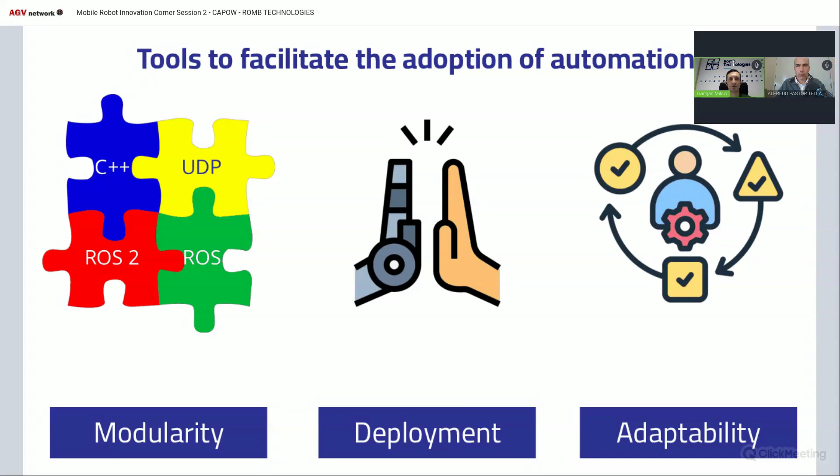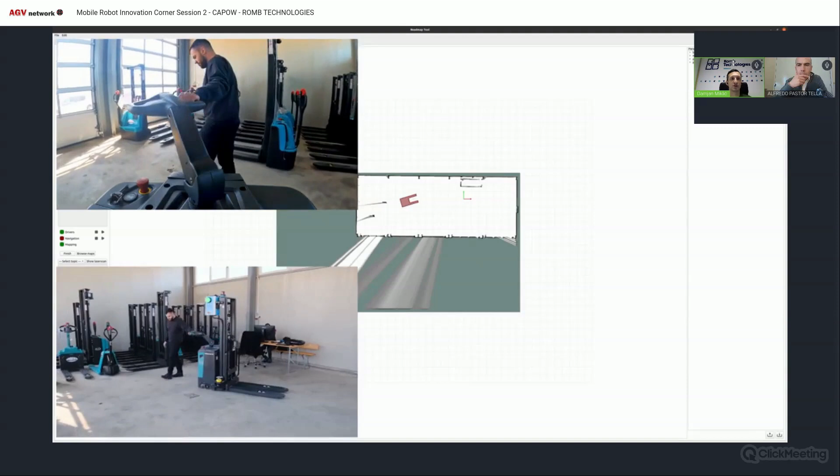Deployment starts with making a map of the environment. It used to be that you needed reflective markers which need to be installed and tuned, but now with our software solution, you can just drive the robot around the environment manually once, and the robot will use the laser scanner data to build a consistent and accurate map of the environment. In fact, this map can be used immediately for navigation - there is no need to clean the map or remove artifacts. The robot uses its onboard laser sensor and wheel encoder, fusing this data to localize the robot in real time using just the natural features of the environment.

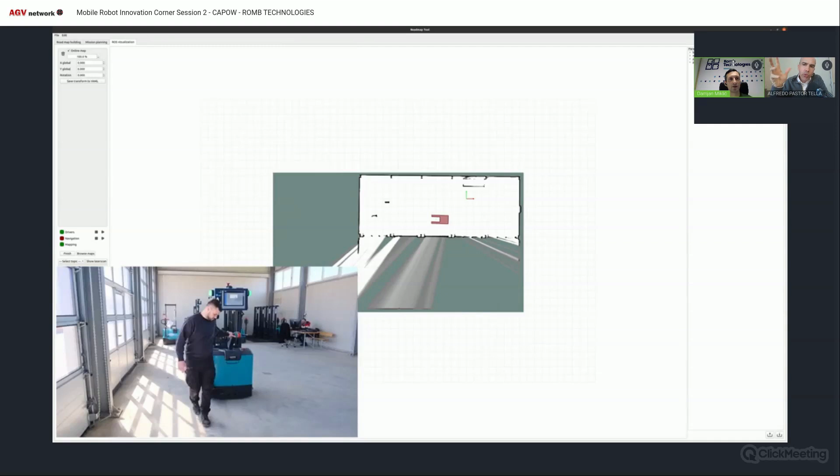But Damjan, when you say that it's not necessary to clean, I can imagine that it depends also on the environment, because if you have very neat walls or columns, maybe it's true. But if you find many different things, maybe you need to clean somehow. How does it work?

That's true, so there are situations where some cleaning may be necessary - typically if you use the safety laser scanner for localization, and if there is a lot of clutter around, then maybe you would need to do some cleaning. But typically, if you use it for a navigation laser, so far we haven't had a need for cleaning, because the algorithm is quite robust. As long as it sees some fixed landmarks, some fixed features of the environment, it will attach to those and basically ignore the smaller inconsistencies.

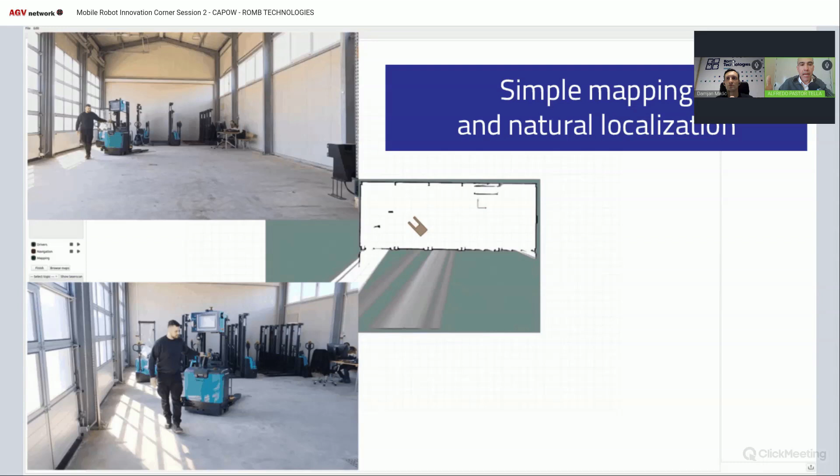So in case we are just using the upper LiDAR, theoretically it's not necessary to clean the map anymore. So the result of the first initial mapping is already good for navigation. Exactly, that's right.

And this was a small environment - we're still a small company, so our testing area is a small hall. But the biggest space we did is 240 by 250 meters, so 60,000 square meters. And this was an especially difficult case because it had a lot of windows and just columns, very few features. So we have tested on this size of environment and it works.

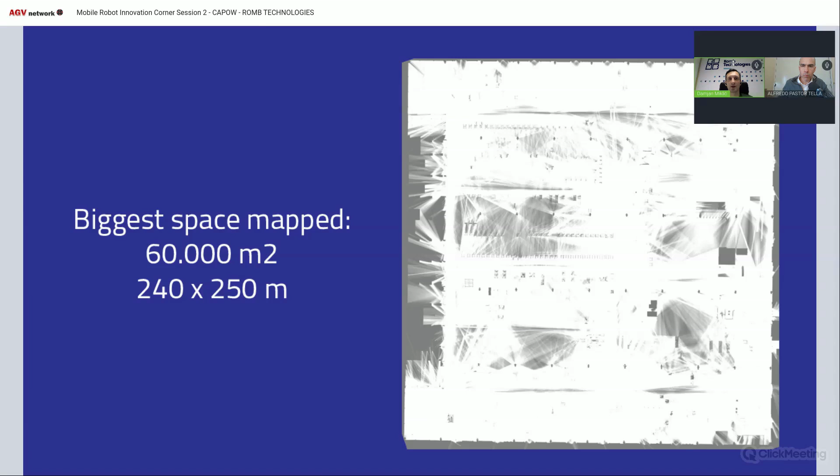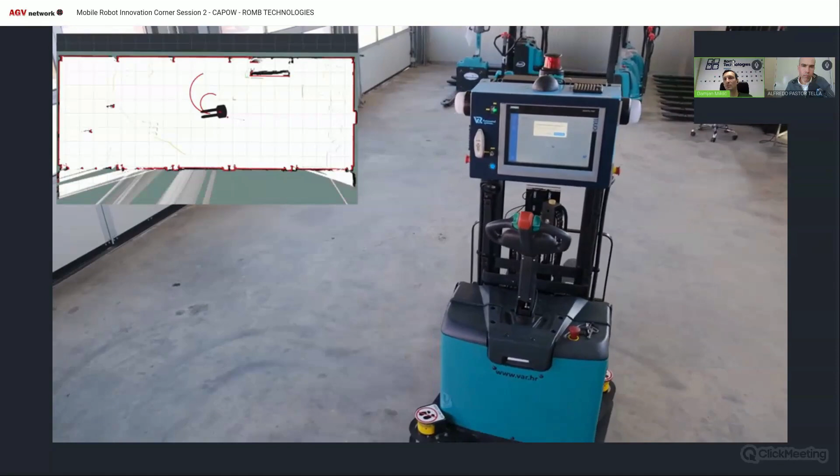So the next important thing for the accuracy and efficiency of the system is calibration. The accuracy of the system depends on the mechanical construction, where you mount the laser, and the laser is never going to be mounted perfectly. So you need a way to handle this, because even a centimeter of error in laser mounting, or maybe half a degree of error, will cause problems when the vehicle needs to position itself.

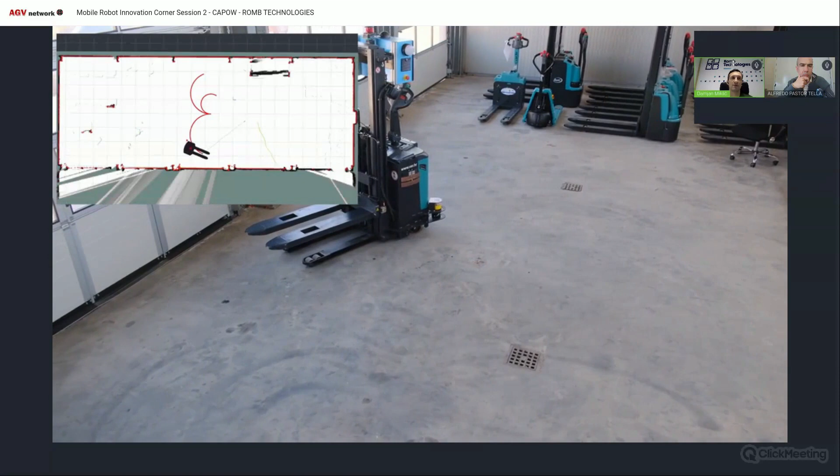This is something that typically people in the field spend a lot of time doing - calibrating. You could calibrate in the factory, but typically the navigation laser is dismounted for transportation, and once you mount it, it's never going to be mounted perfectly. So for this we have developed an automated calibration procedure, so it doesn't depend on the skill of the operator anymore, and doesn't require him to do this tedious procedure where he needs to be focused for a long time. The vehicle just does some maneuvers, and based on these maneuvers it automatically calculates the laser pose, also the parameters of the wheel, if there is some offset of the steering, etc.

All of this, based on the maneuvers, is calculated automatically, and you can put 5 or 10 vehicles to calibrate at the same time, and they will do it in parallel. So one person can calibrate instead of spending up to an hour per vehicle. This procedure takes about 10 minutes for the whole set of maneuvers.

Imagine I'm importing a vehicle with your system and installing it. You said you remove the navigation because it's very costly, and then transportation is a disaster. So typically we remove it, put it back, and then you need this calibration. What you're saying is that you have this automatic calibration, some kind of program that you launch, and the vehicle itself auto-calibrates, something like this?

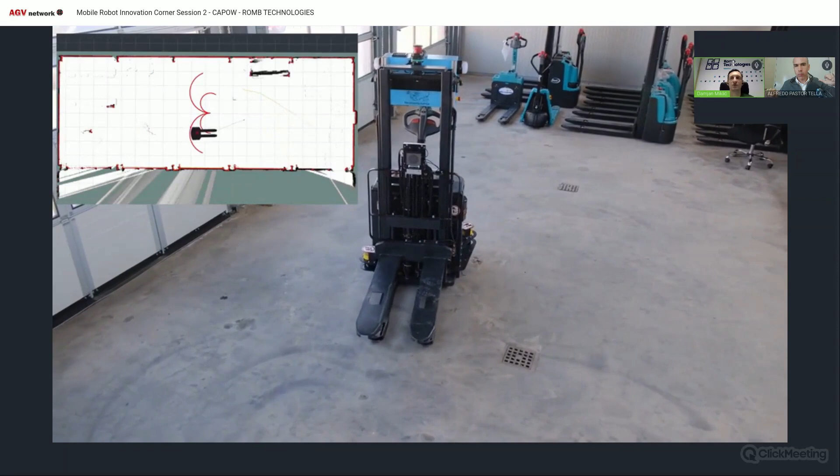Exactly. So the vehicle does these maneuvers that look basically like what you have seen now. It drives in circles of different diameters, and after about 10 minutes, it auto-calibrates.

But do you do the calibration before or after the mapping? Good question. You do it after the mapping, because you need to have the map, and you need to localize on the map to be able to calibrate.

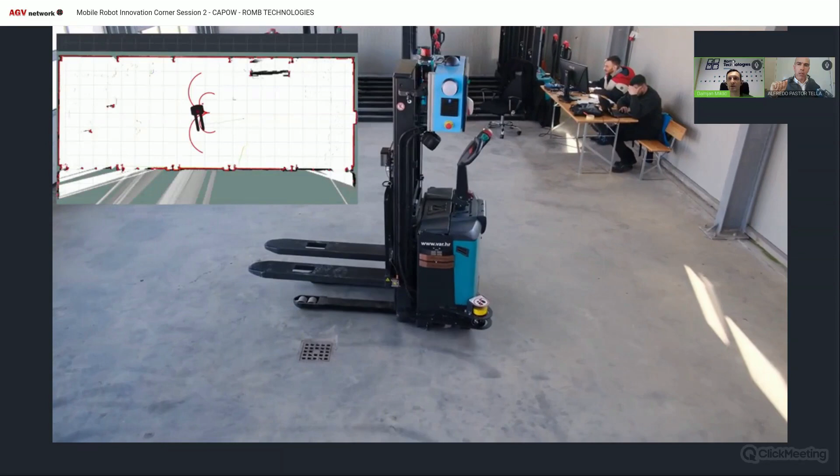And how do you make the first mapping if it is not calibrated? I mean, it's like a loop. Yeah, so basically for the mapping, the mapping uses only data from the laser, so it doesn't care about where the laser is on the vehicle. It will just create the map regardless.

We have one question, Damjan, in the chat, asking if you need reflectors for this mapping. No reflectors at all. We just use raw laser data, which uses the natural features of the environment to localize.

Let's talk about calibration for one second. We have another question asking: in auto calibration, do you need more space even if the area is already mapped? How much space do you need for auto calibration?

That's actually a good question. That can be a constraining factor. You do need some free space, like you saw, for these maneuvers that can be seen here. So they do take up some space.

In any case, you will provide some kind of footprint or something, because if I have to calibrate, I need to know more or less what space I need. Yeah, exactly, that's right.

Okay, good. Absolutely. So there are actually some ways to optimize the space, because right now you can't do it in an aisle. You need to have a staging area free to do the calibration, which if it's a really big vehicle, can be a problem. So we're working on something to do it in an aisle. But right now it does require some space.

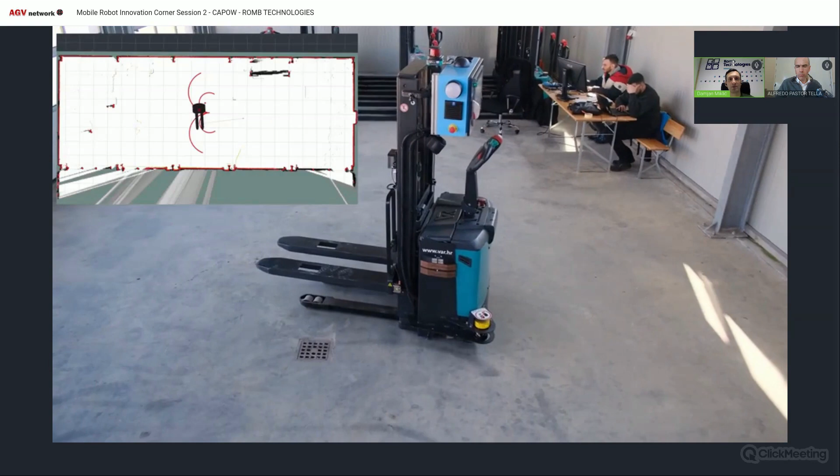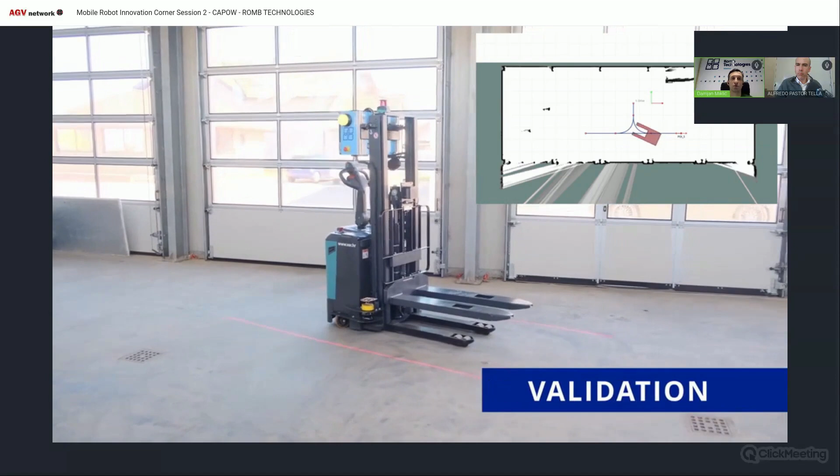After calibrating, the important thing is to check if the calibration has been successful and if the whole system is well tuned, the controller, so if the whole vehicle is accurate. The way to do it is to approach the same point from two different directions and then check the relative error. Ideally we would have a system that would tell us the exact truth, but those systems exist and they are really expensive.

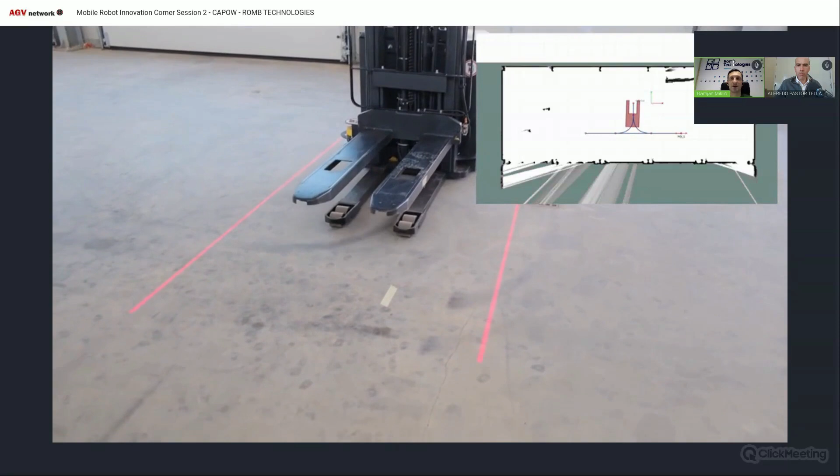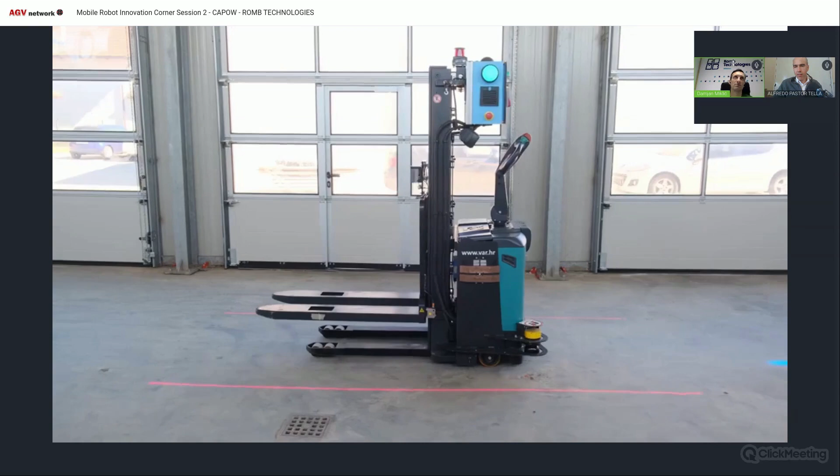As a next best thing, we measure relative positioning accuracy, and this comes up in applications very often. It's much easier to make a vehicle that's always accurate when it always drives the same path. But if you need to approach the same point from two opposite directions, this is really when any inaccuracy in your calibration, your control system, or your localization is going to show up.

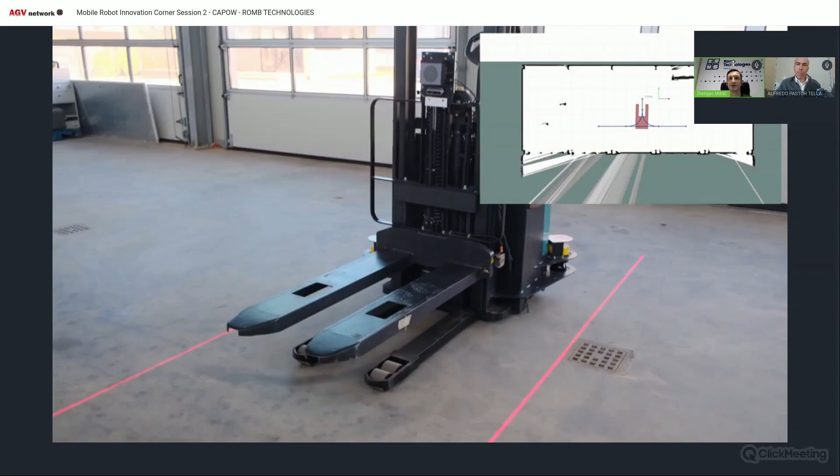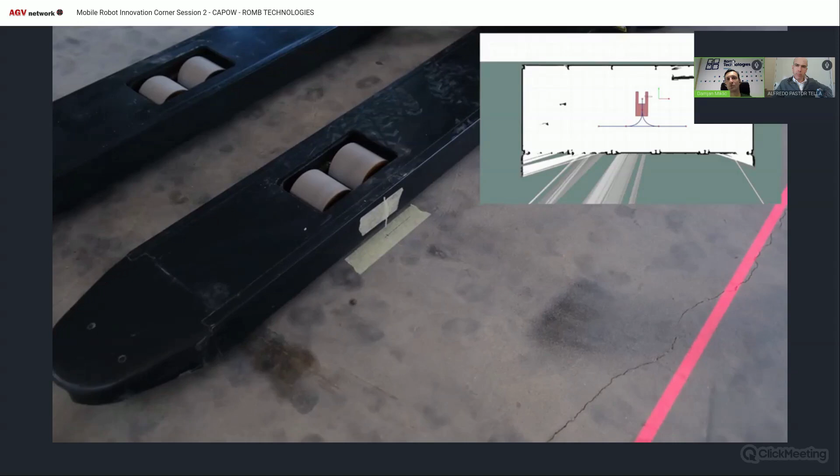And this is a test. So when we claim to customers that our control system, our navigation system, is accurate up to less than 1 centimeter, this is what we mean: that the error in these relative positioning tests will be less than 1 centimeter apart.

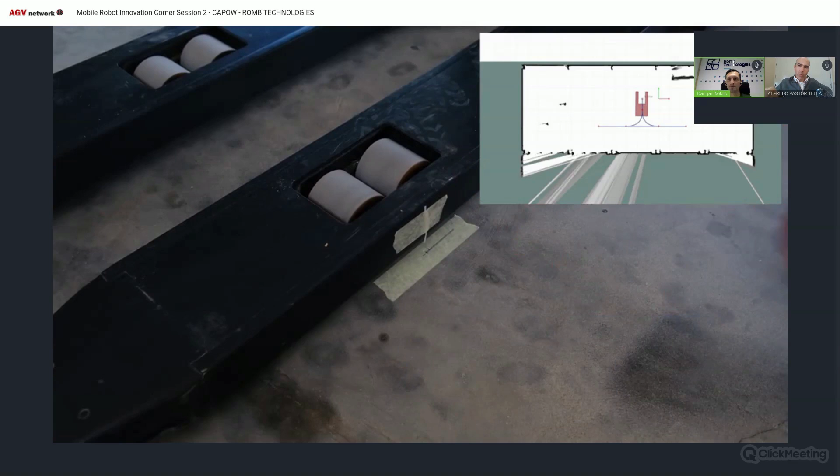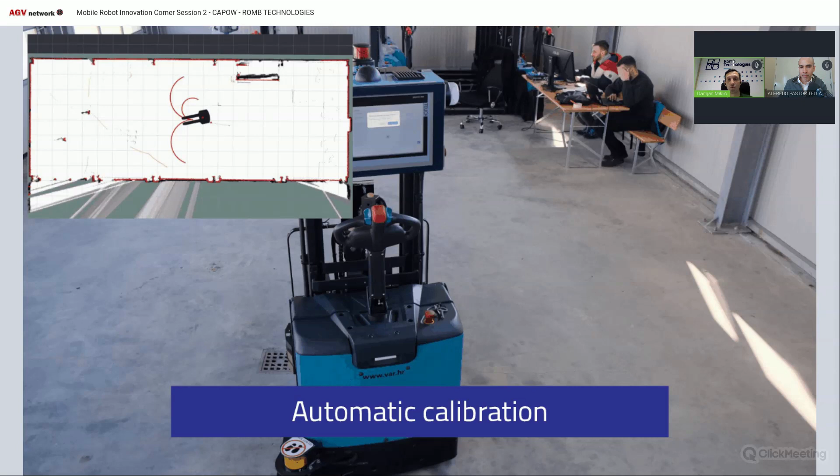We had this question about the accuracy of the localization. It depends a lot on the vehicle, because if the mechanics are not great, if everything isn't perfect on the vehicle, we might have some tolerance problems. But if everything is good, you get about 1 centimeter accuracy. It's not only mechanical; it's also the low-level control loops and how they're tuned. There are a lot of things that need to be well tuned for the system to work well.

So the next step after calibrating is: we made a map, we calibrated, and now we want to design the roadmap.

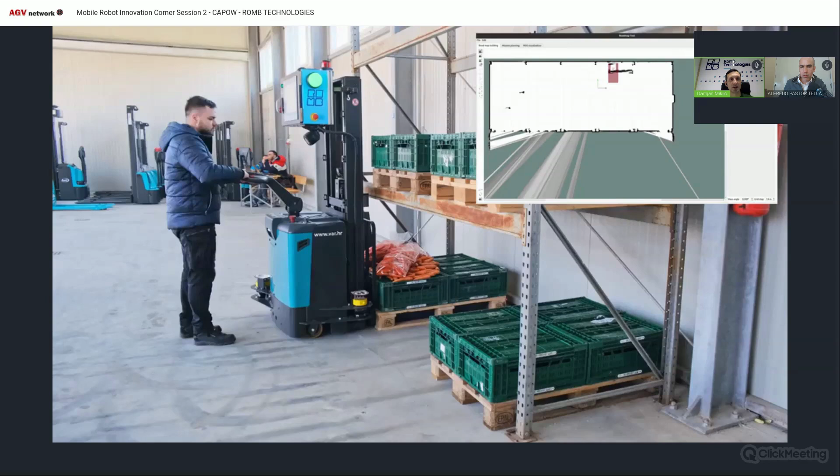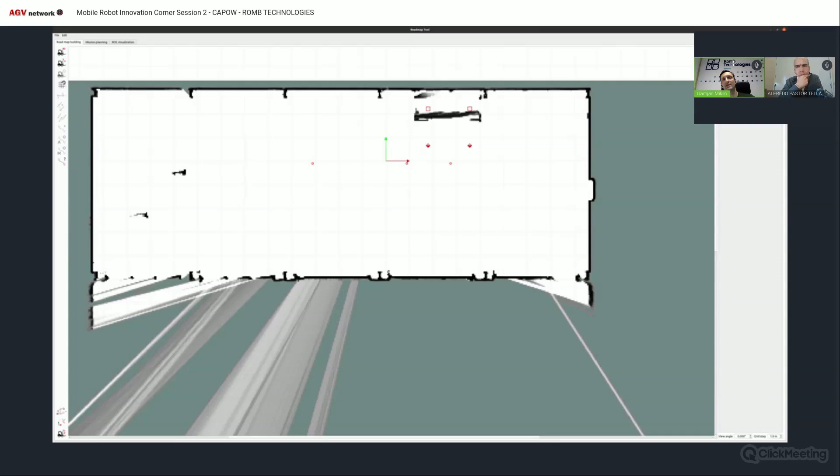When designing the roadmap, typically we start by physically tagging a few key positions. For instance, if you have a big storage rack, we check where the beginning and end of the rack are, place the vehicle there, and remember these points in the map. Then we can interpolate between these points, generating points at fixed distances. This is a simple use case with one interpolation, but imagine a long corridor with tens of pallet places - you just tag the first one and the last one, then interpolate in between, which really saves a lot of time.

And then we place all the different types of what we call points of interest - so you can have a pallet place, a pre-pallet node where the vehicle does some preparation like lifting the forks to prepare to go under the load, some normal waypoints, and a charging node, and we connect all of them.

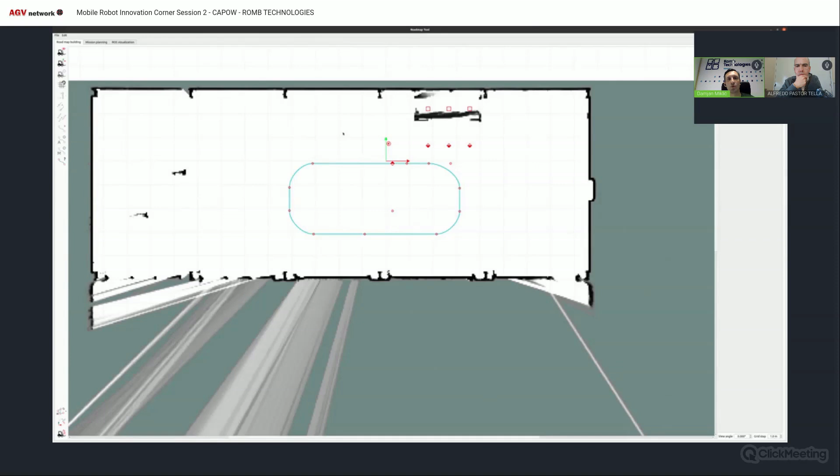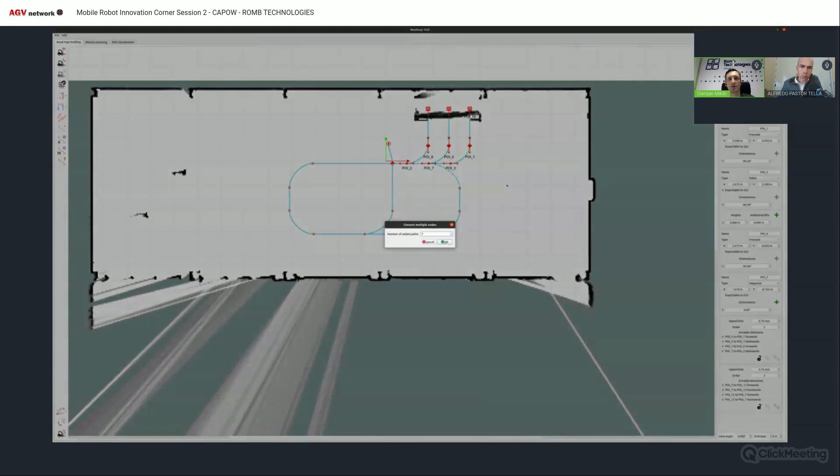With our engineering tool, we support automatically connecting several nodes - you just select several nodes, click connect, and they all get connected together already in a reasonable roadmap. Of course, with a more complex setup you'll need some manual corrections, adding or removing some things, but a lot of this is done automatically, so you don't need to draw every line.

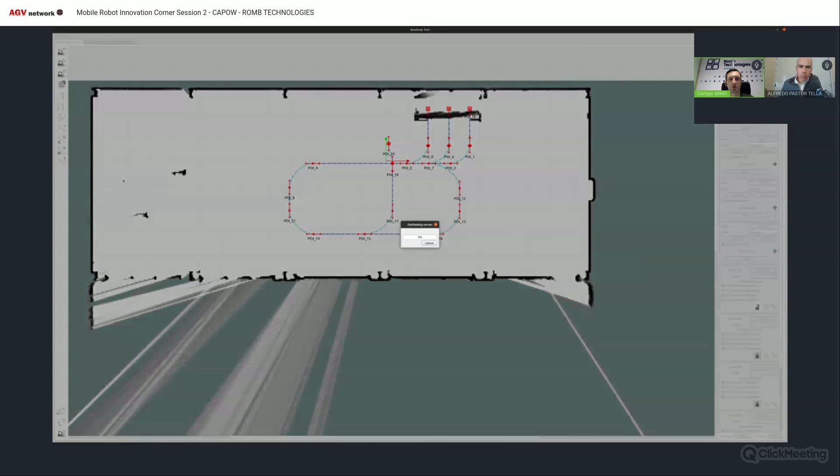Furthermore, there's a built-in optimization procedure, because what's really important is that these curves are continuous, so the vehicle can drive them without error. We have a built-in optimization procedure that optimizes the curves to ensure continuity between the nodes.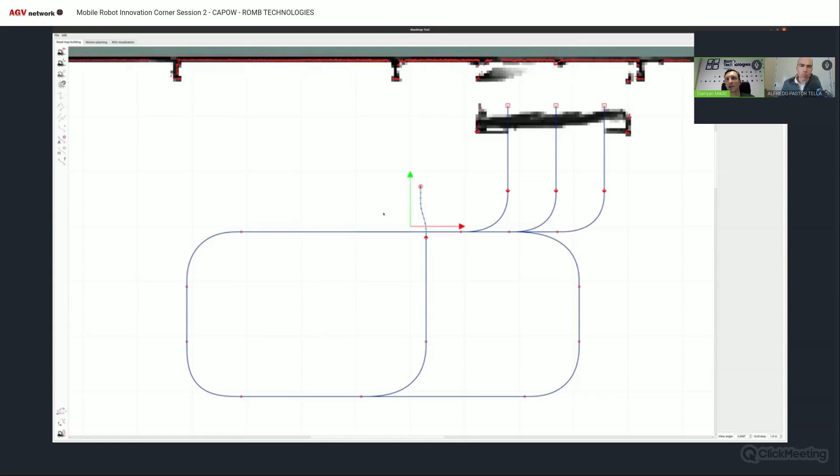Sometimes you do need to tune by hand if it's a complex space, or if you want a more complex maneuver. In this case, the curves are modeled by high order polynomials, where the designer can manipulate the control points to get any shape of curve they want - polynomials up to the 10th order. So you really have a lot of liberty in shaping the curves.

So basically, the system helps you draw these lines, whether they're curves or straight lines, but you also still have the flexibility to modify them yourself.

These drawn methods are important because when you go to install, this is a lot of the job that has to be done on the field, and it requires quite a lot of time - especially when you have a buffer with 100 pallet positions, so routing all these nodes and all these things typically takes a lot of time.

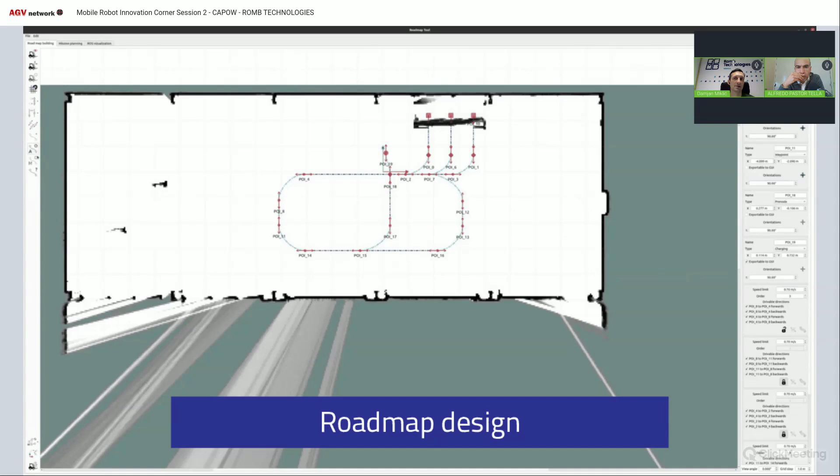Exactly, so this is the part we try to automate as much as possible, while still leaving the opportunity to fine tune it by hand.

So another important feature is that as you're changing the roadmap, it's an iterative process - you make a roadmap, try something, then see that maybe the safety fields aren't right, there's a problem with the safety fields that you need to adjust the route for, and then you need to retest.

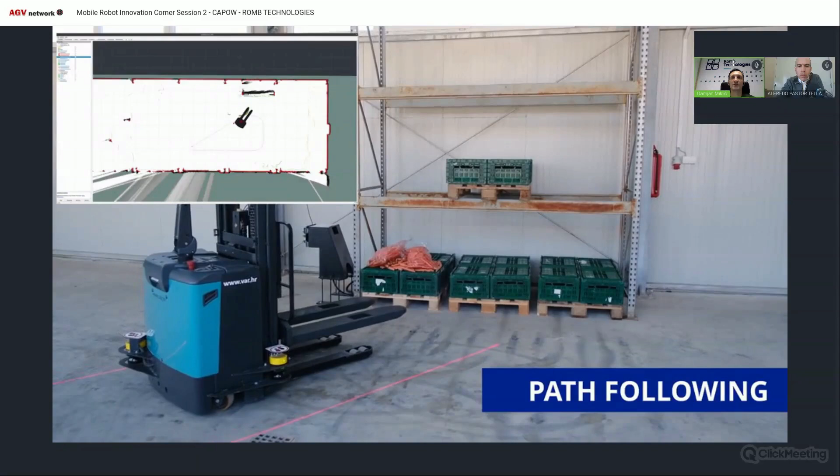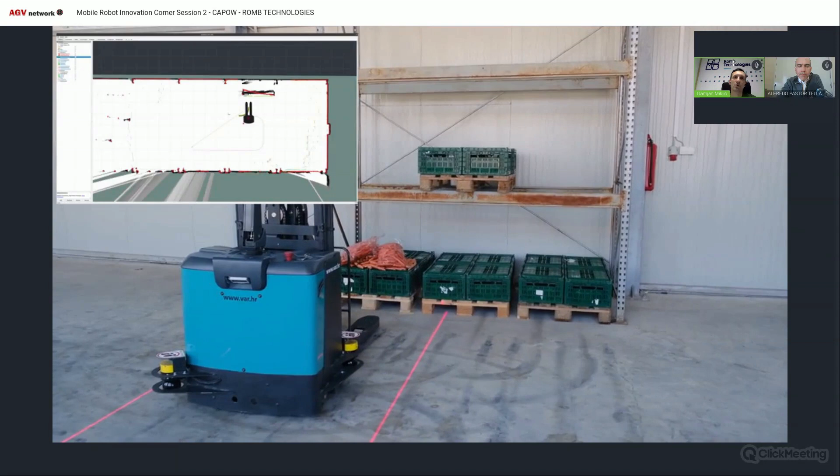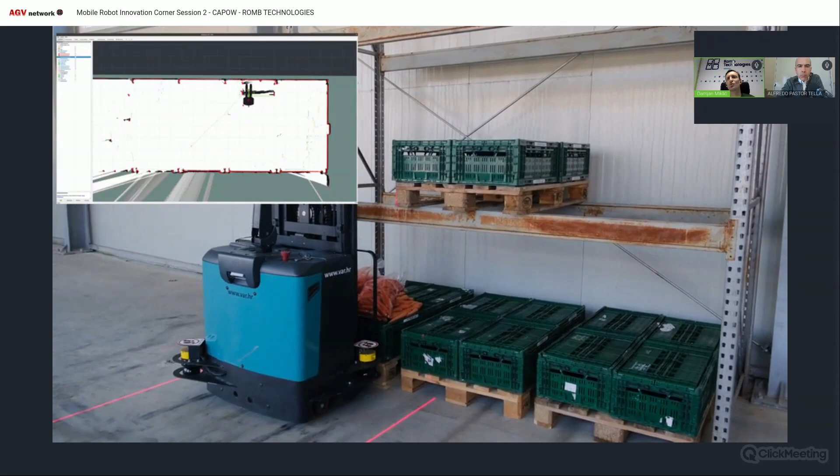All updates to the roadmap are transmitted live to the vehicle. As you make a change, the vehicle already has this roadmap available, and you can just quickly iterate and test. Working with some clients, they had custom in-house tools that didn't support this, and we were spending a lot of time making a change to the roadmap, downloading it to the vehicle, and then seeing that it doesn't work - this iteration. So we really try to make this iteration as smooth and fast as possible. As you change it, it's live on the vehicle.

And then, during vehicle operation, you can monitor the execution of the curves and the way that the vehicle is operating.

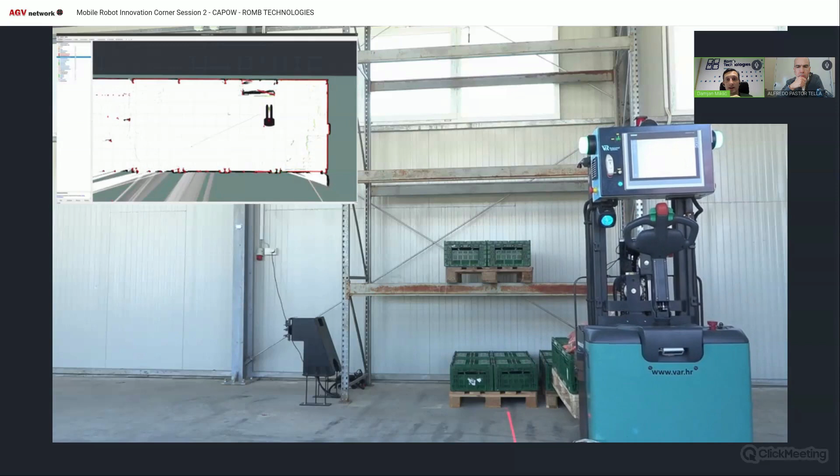Another thing I want to note: this prototype vehicle was built from the ground up by our team. We used a manual forklift base, and we did everything - sensor selection, sensor installation, mechanical conversion, everything. Because we started as a software company, we said we won't get our hands dirty with hardware, we'll just do the software and let other people do the hardware.

But we realized that, like you said before, everything is actually interconnected. So very often when we work with the client, we actually also help them. We always tell them the low-level control loops need to be well tuned for the control, but sometimes their idea of what a well-tuned control loop is differs from what we actually need. So we're also able to help them with that, to really have all the layers of the system working well, to have a whole system that's performing at a high level.

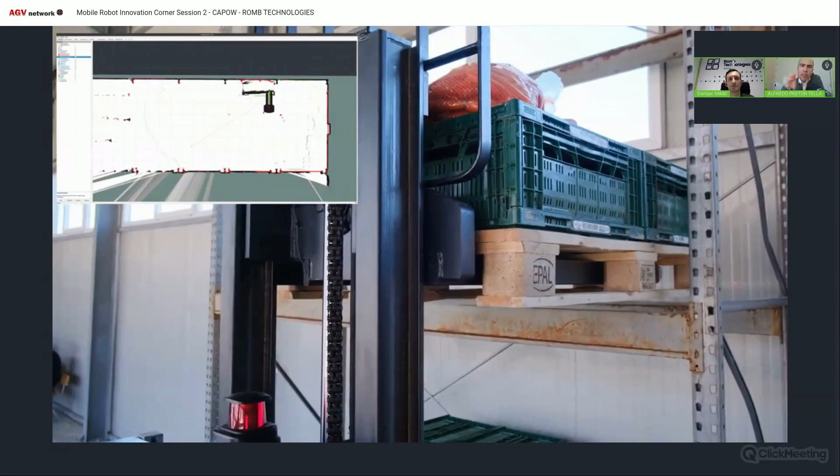One question, Damjan. We see here a forklift, but do you support other types of kinematics, for example differential drive, other things, or is that something you are developing?

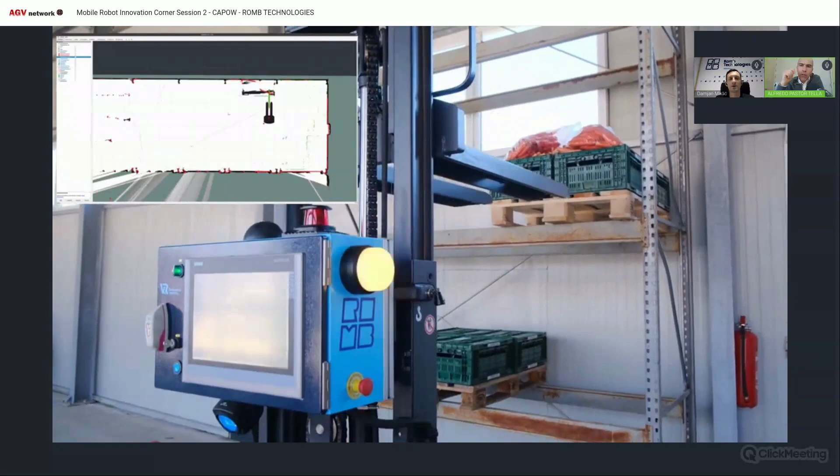Absolutely, great question. Yes, we support any type of kinematics in 2D - moving on a flat floor. This is actually something we did a lot of research on. We support forklift-like tricycle, differential drive, but also arbitrary number and configuration of wheels. Sometimes we'll have 2 wheels that can steer and have traction, sometimes more, like 4 or even 8, in any configuration. Our control system, both localization and path following, applies to any configuration - you just tell it where the wheels are, and it will know how to control the vehicle.

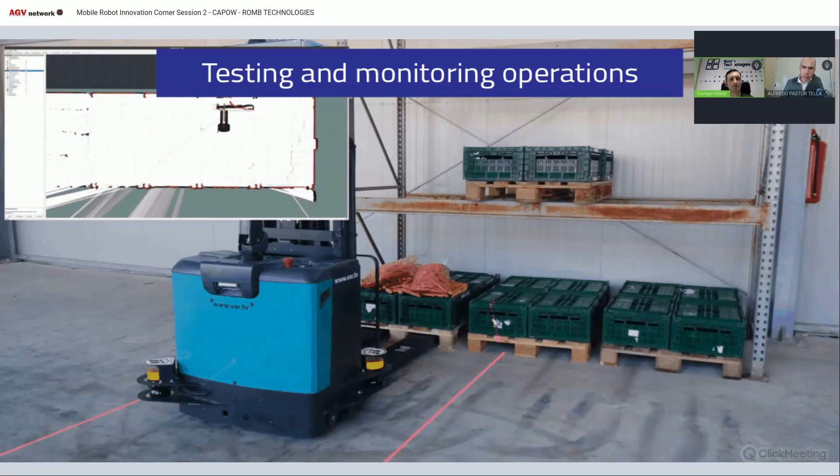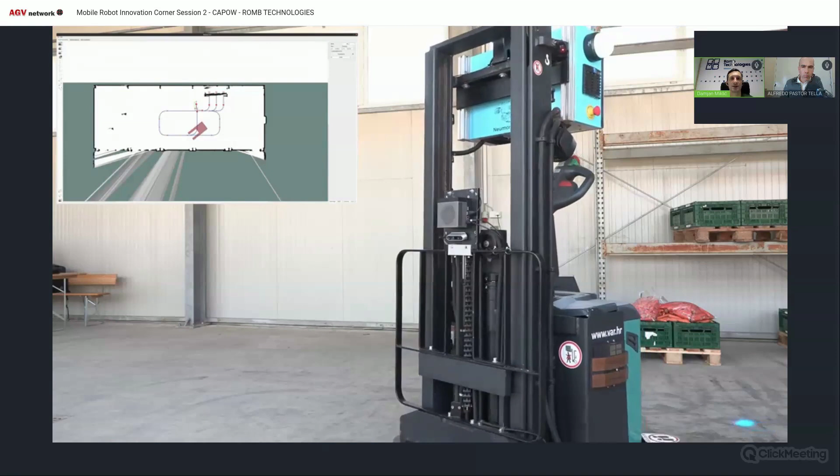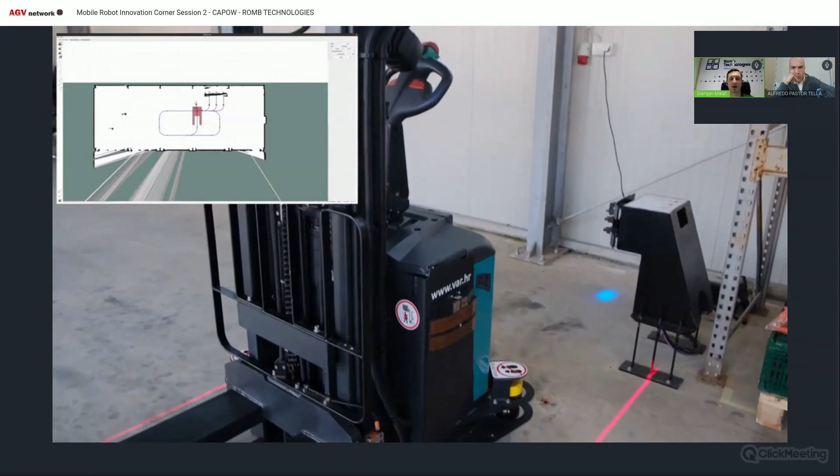So one important thing - this is really something we invested a lot of research effort into. I want to show video number 5, to really work with different kinematics, and with all these kinematics to be super accurate. We use a method based on model predictive control, which has a model of the vehicle. It optimizes - it knows all the maneuvers the vehicle can make, and it chooses the optimal maneuver at every time step to get the most accurate following.

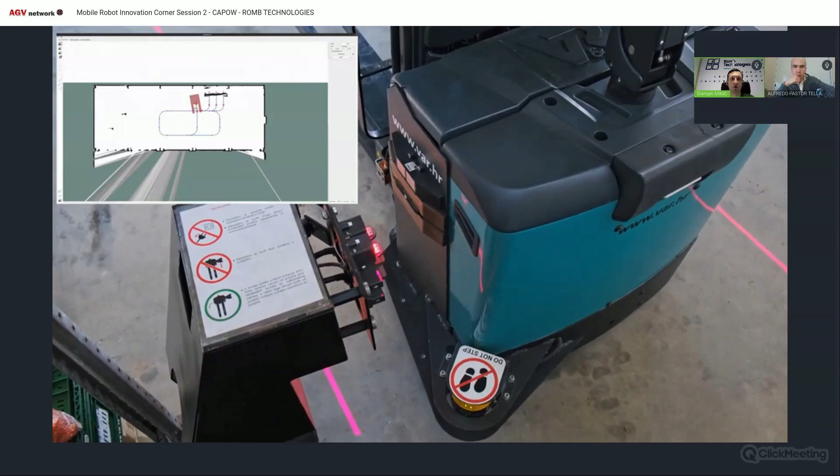And we've recently been granted the European patent for this method. So what is special about this MPC control method? Why is it so accurate?

It takes care of several things. First, it knows the dynamics of the steering - it knows the vehicle cannot steer immediately, so it's aware of the steering dynamics. It's aware of the whole kinematic configuration of the vehicle, and it has special adjustments: when the vehicle is going more slowly, it knows it can look further ahead and has more time to calculate. When the vehicle is going faster, it has less time to do calculations. Model predictive control is also specific because it takes into account actuator limits - not only that the vehicle cannot steer instantly, but also velocity and acceleration limits. It takes all of this into account to achieve really good accuracy.

This is, let's say, state of the art, but it can help deployment - there's still the human-robot interaction part that's challenging, right? When a person leaves a pallet that the robot needs to pick up, a person is never going to be as accurate, or people sometimes leave things where they shouldn't. And the robot, as accurate as it is, in this setup is blind - the laser just tells it where it is in the environment, but it doesn't really check where the pallet is, etc. So what we've been working on intensively is...

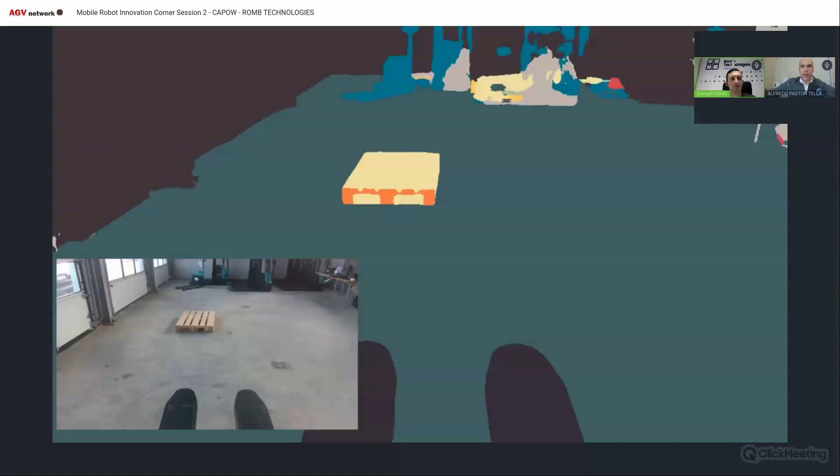You said the human interface is a challenge, and you're being politically correct, because it's a nightmare.

Well, yeah, I guess you could also call it a nightmare.

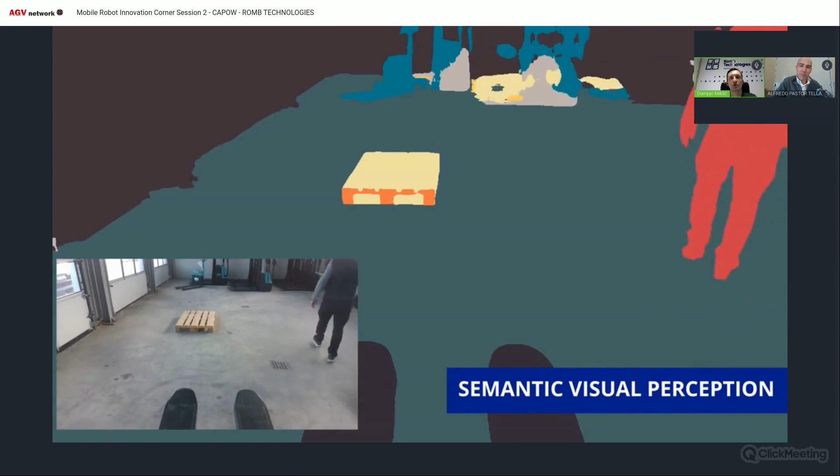So this is a technology called semantic segmentation. It's an AI technique which lets the vehicle know, for every pixel, to what type of object this pixel belongs. So, for instance, it knows.

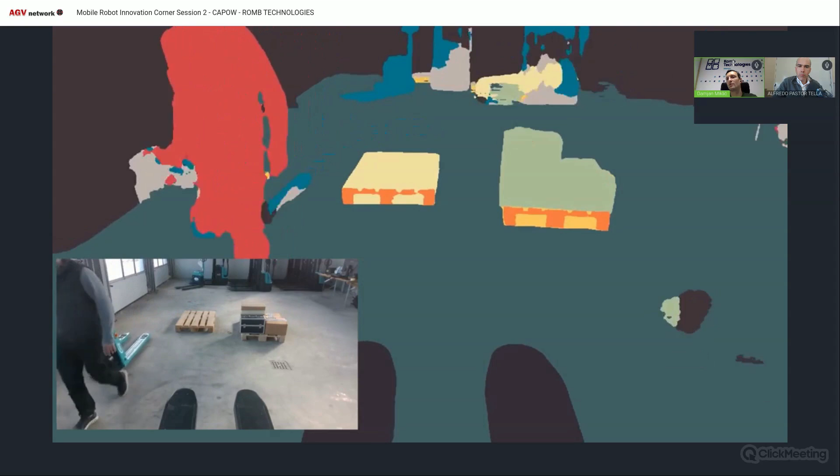We encode this in color just for us people to visualize it more easily. So we see that green is the floor, light yellow is an empty pallet, orange is the pallet face, dark yellow is a loaded pallet, green is a load, blue are other vehicles, etc. This really provides a new level of understanding to the vehicle.

And this is done with a different device, okay? Is it a camera? What is that? Yes, this is a camera. Of course, it needs a camera to do this. Absolutely, yeah, it cannot do this with a 2D laser. No, but it's a kind of add-on.

And what is the typical application of this? Okay, I see you are segmenting the stuff, person, pallet, etc. But what are the applications that you are implementing in the robot? Well, excellent question, this is what I'm actually coming to next.

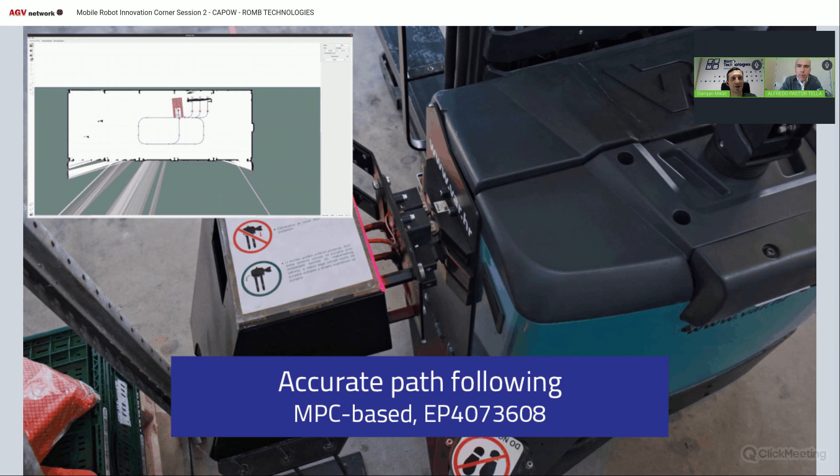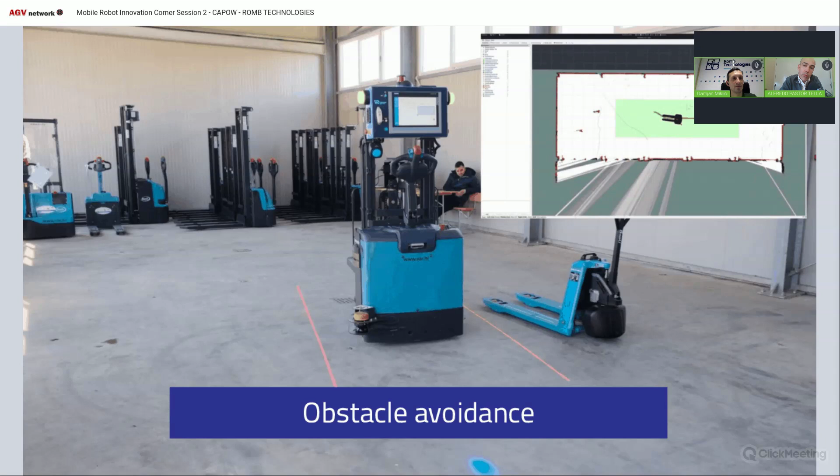So the first application is obstacle avoidance. Okay, so you do optical obstacle avoidance thanks to this segmentation.

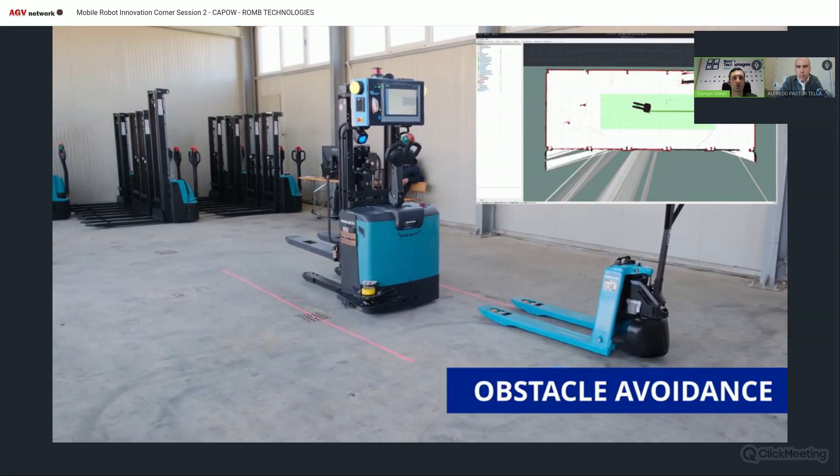Yes, exactly. So with obstacle avoidance we use all the available data. We also use the safety lasers, but we also use the camera. In this case this is also a depth camera, so in addition to the RGB, it also has a depth channel. So we also get coordinates of objects in the space. Based on this, we can, for instance, see these forks, which are typically invisible to the navigation laser, and we can avoid the obstacle.

Of course, avoiding the obstacle is not always a good idea, not always necessary, depending on where the vehicle is. That's why you can define zones. You can see here it's indicated by the green rectangle, where you can say, okay, in this zone the vehicle is allowed to avoid obstacles. In some other zones, not, because this is also, as you know, an issue of safety regulations.

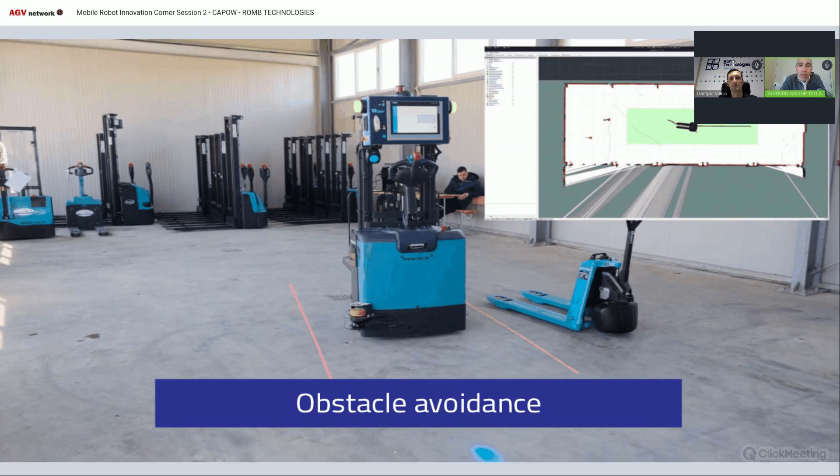You know that in the environment you have to see where the vehicle operates. There is a lot of discussion about obstacle avoidance. I always say, who cares? It depends on the project itself. If you have this feature, the better it is. If you have the possibility to avoid whenever it's feasible and safe, of course the better it is. So there is not a net answer of yes or not, it depends on the application. But this also, I agree, if you have it, it's better than not having it.

Exactly, of course. The first thing you tell clients is you need to make sure there is no stuff lying around. But then you have some clients who, for instance, work 3 shifts, and sometimes there is nobody there in the facility, or no technical personnel in the night shift, because night shift is really a big problem for people. So if there is something left in the pathway, it's better that the vehicle avoids it than to lose the whole shift of operation, right?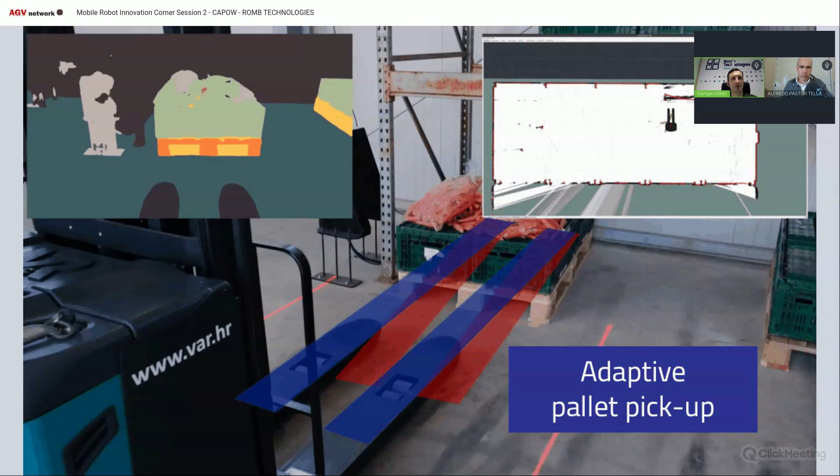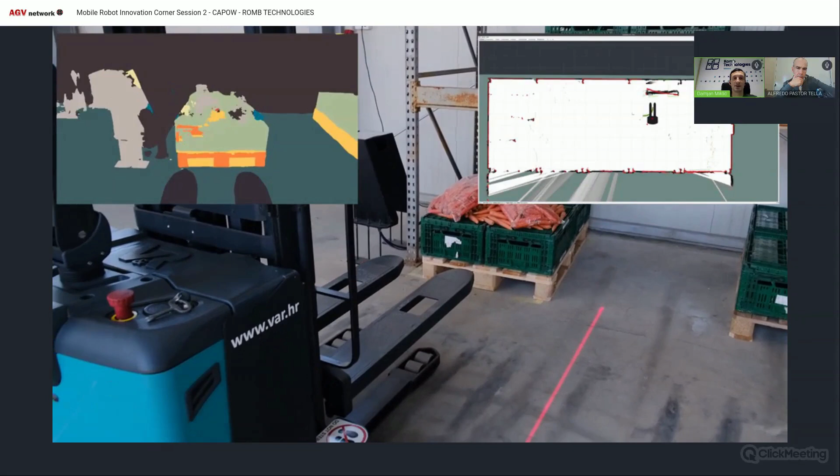Okay, and so the next application that we did based on this is adaptive pallet pickup. So this is again the human-robot interaction challenge, which is, what if the person left this pallet placed inaccurately? In this case, the vehicle can see it, recognizes the pallet face, and can estimate its pose, and can see that it cannot pick up the pallet from the default position that was remembered in the roadmap. So in this case, we allow the vehicle to replan its route and do a new approach to pick up.

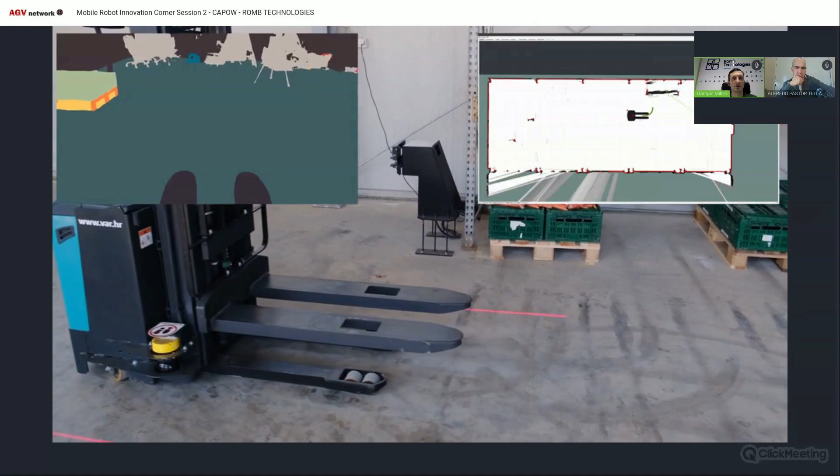Which we will see right now, and you can see here in the top left corner, the segmented image that the vehicle sees. It replans the path at a bigger angle, and with this it's able to actually correctly pick up the pallet.

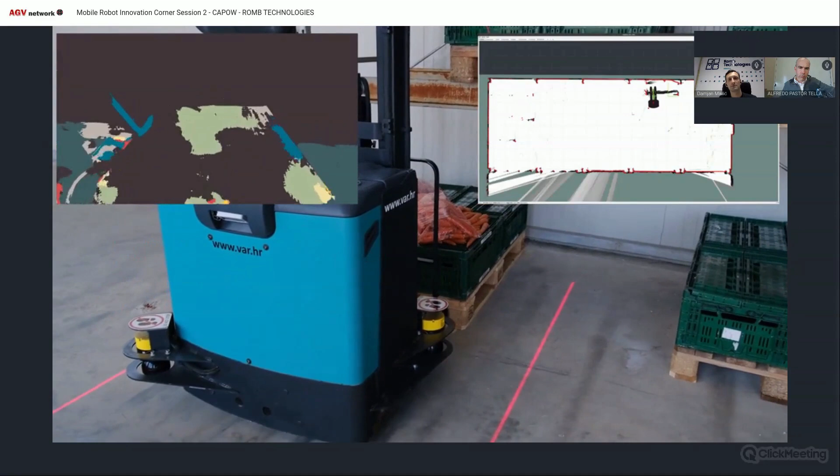It's clear the tolerance cannot be always perfect when people are putting pallets. We saw in the video that this movement is in any case quite slow. Is it possible to approach the pallet correctly on the first try, or do you have to go verify, go out, and go in?

It depends on the space you have. If you have a lot of space to approach the pallet, then you can, but usually in a warehouse you never have a lot of space. It also depends on the kinematics of the vehicle. We're working with a standard tricycle vehicle, but a lot of manufacturers now, as we saw a couple weeks ago at Logimat, have vehicles that are omnidirectional. An omnidirectional vehicle could correct immediately, or if the vehicle had side shift on the forks, it could also just move the forks to pick up. So there are different options for different situations.

This is the end of the presentation, but there are some questions here. For example, what are the requirements in terms of computing capacity for your solution? I guess you are providing the software—imagine that I want to produce a mobile robot, is there a requirement in terms of computing capacity?